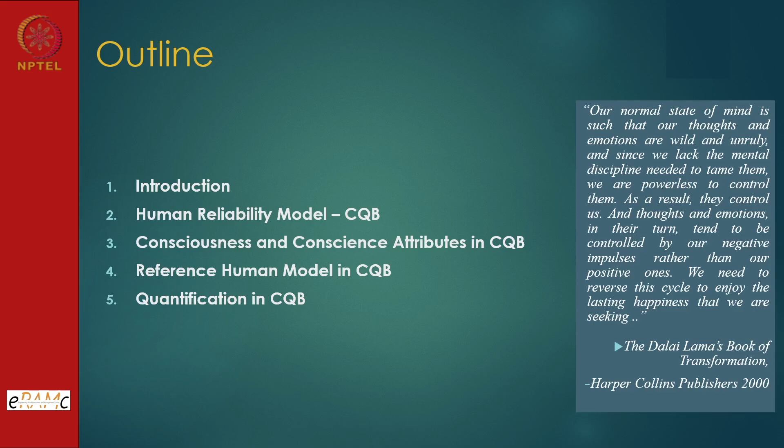So let us see. Of course, we always draw a parity with the hardware system, and that is how it is - it is nuclear safety, one of the principles of defense in depth. Because our topmost priority, our safety, is an overriding factor. So defense has to be built into the plant design, operation, maintenance, every aspect of safety critical system or risk critical system. And what we mean by defense in depth, that we will understand.

So why are we doing it? At the end of the day, it is ensuring the reliability and safety of the plant. That means it should be able to deliver the designated output without interruption. That is what the reliability term takes care of - uninterrupted operation, and at rated power. So then availability factor comes. And then safety - safety, as I mentioned, is an overriding factor, so it cannot be bypassed.

In fact, it's not just a slogan, but there is a document in the plant called technical specification, which ensures that various parameters are referred to as safety limit, limiting condition for operation, and surveillance criteria, training criteria, all designated responsibility. So if we deviate from that document, it becomes a safety case. So it is not merely talking about safety, it is implementing through documents - technical specification or limiting condition for operation is the LCO. They are basically the document which has to be followed verbatim. So that is the kind of seriousness which is there as far as safety is concerned.

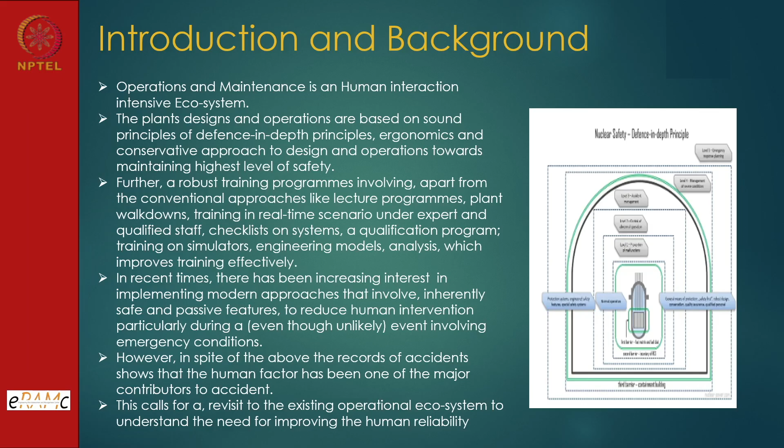But since today's topic is human factor, and we've talked about other things too, we will focus this discussion on human factor improvement to the extent possible. Before I get on to this slide, you can see...

The Dabbawalas reflect a culture of no failure, or almost zero failure, because when I say 10 to the power minus 6, one failure in 10 to the power minus 6, that means they are approaching a negligible or rare event level, and they have achieved it. They have won the Six Sigma award. So when the Dabbawalas demonstrate this level of performance, one or two failures in 10 to the power 6 opportunities, this is a great demonstration, and it's an example for everyone to learn from. You might call their system simple, but if you look closely, the job is very challenging, and that way it's a lesson for everyone.

So when we talk about human failure, it's not that humans are not good or don't perform well. There are millions and billions of opportunities where they have taken the right decisions and right actions, but the systems we deal with are, as we say, safety critical systems.

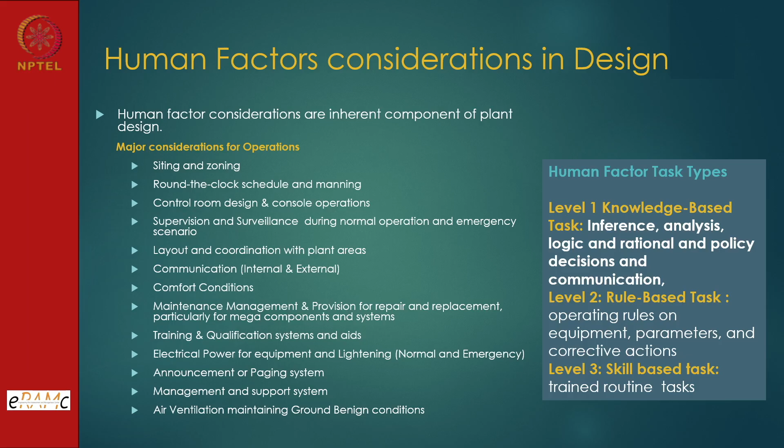So what we come to a conclusion is, all three jobs have their own importance, and the training and management system ecosystem should be designed to cater to these three categories.

And if any small deviation is there, they can pay attention easily. So looking at so many instrumentation controls and all, one should not get overwhelmed. They should think how well it is being designed to draw attention even if there is a minor deviation, and the advice and information that are available to them. In 99.99% of the time, the authorized staff take the action and they bring the plant into control.

Now control room also has been evolving. Generation 1 control room, it was a hardware mimic panel. Mimic panel means how the system engineering drawings are simplified to provide only essential information that is required in support of decision making in the control room environment.

So there will be flow, which are the system color codes, how much is the flow - there are meters and instrumentation, and their lineup in a broad way is brought over here. Then we have trips and alarms. Trips mean some alarms or combination of alarms that bring the system to a shutdown state, derated state, or offset state.

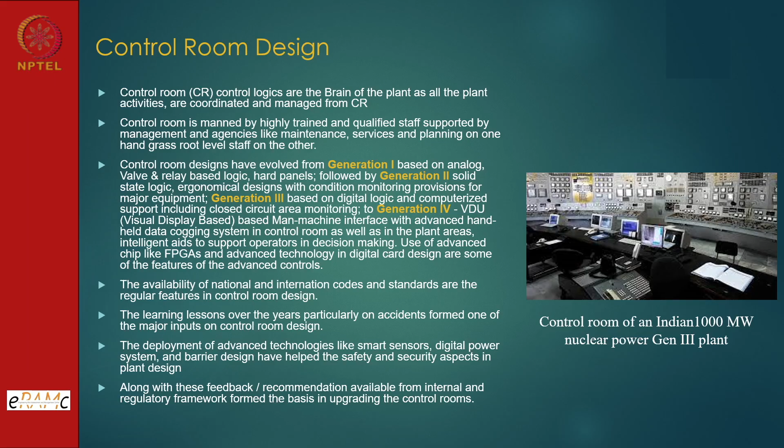Plants are there, but the concept of man-machine interface is always there, and now it is percolating down into various plant areas also. The design of the man-machine interface system should be such that it moves from presenting information to giving diagnostics, prognostics, and indicating any deviation in the area. The principles of ergonomics are very much applied, helping in the design of the control room and plant areas, along with communication systems that help reduce the chances of error or anomalies.

For example, the core process goes in the centre, which is required for plant reliability, while safety systems are located appropriately for transients. So the location of equipment in control room design determines which system should be brought in, which indications should be brought to the control room, and which should not.

It's a very tough exercise, but now we have advanced methods like probabilistic risk assessment, where we can create an integrated model of the plant, and from there we can pick up importance measures of the plant, and from whatever important equipment is there, their status can be brought out.

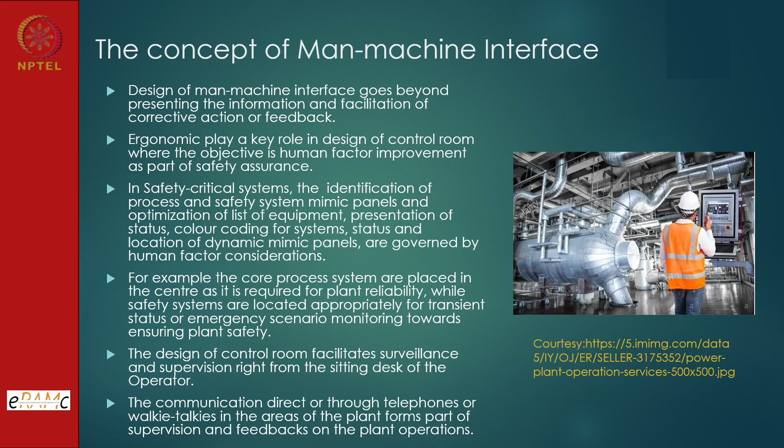Now, simulators are a relatively new entry. In fact, for nuclear power plants, it has been there for over tens of years. But now, keeping in view the advantage, it is entering into systems which are not having the risk compared to nuclear plants, but other plants like research reactors. So this is one example of a simulator system.

The availability of a simulator has two main advantages. One, training efficiency can be increased because the number of sessions that can be performed in the simulator cannot be performed in the control room of the plant. Though there are in-situ things available, we can observe and learn hands-on when some operations are going on from the control room, but the scope of timing and opportunity both increase when we get training on the simulator.

Of course, the simulator should be a replica of the plant. So wherever it is not a replica of the plant, some reorientation training should be given before training goes into the operation directly. So that is training, one purpose.

Second purpose is, a simulator is a model, it cannot be a plant. So there will be some differences, but there is an opportunity for a lot of research and development. Some core physics experiments can be performed on this.

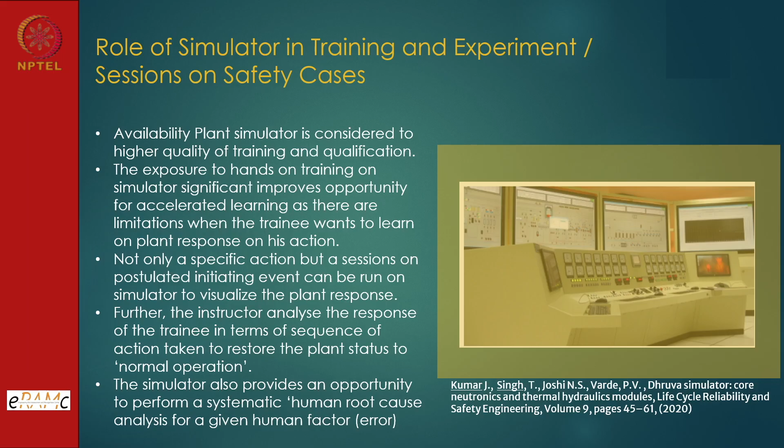We can even simulate many accident conditions in the simulator, since otherwise some of these events will not happen in the life of the plant. So this is one of the very effective arrangements for training, and of course, research also.

Typical human factor matrix, I think we'll be talking about it. The prerequisite is trained and qualified staff, that only can enter as our reference human definition. Then operator experience is one of the things. Human factor consideration in design, that we have already discussed.

Incident learning lessons should go to the ecosystem, and how much opportunity it provides depends on what kind of risk assessment studies are available to the plant, and training should be exposed to that. Insight from human root cause analysis.

Root cause analysis is a very important element, because every failure, once it has happened, preliminary analysis does happen everywhere. But if we understand the root cause of it, we will not only be making changes in that particular place where the accident was involved, but we can reflect those insights in many other places where it is required, contributing to preventing accidents and so on.

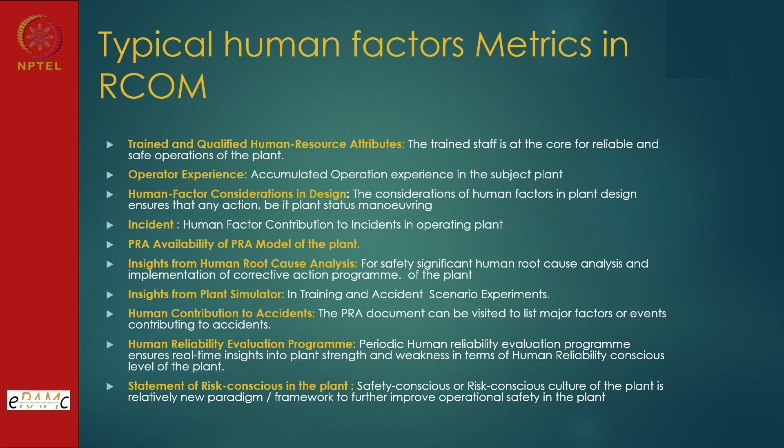And then human reliability evaluation program should be part and parcel of this. A statement of risk-conscious culture, I would say, is a very important thing, and there should be a way to represent this, and there are attributes for this.